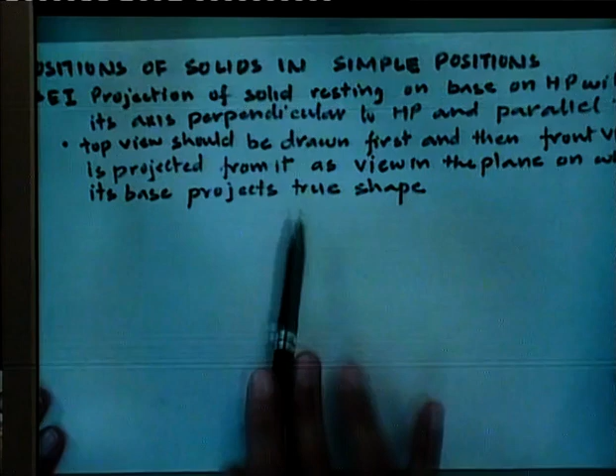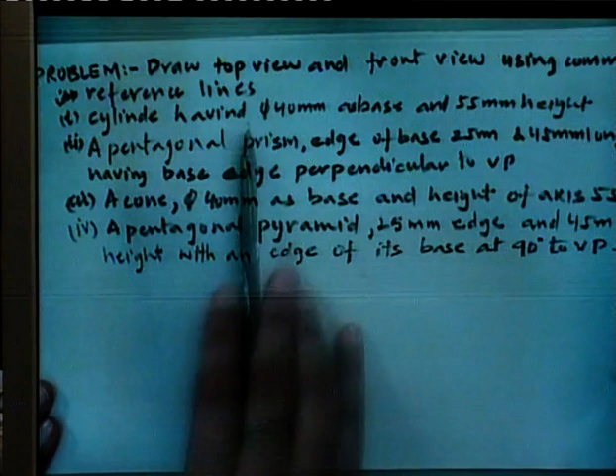Example for this case, simple case. Now the problem is draw top view and front view using common reference lines. First problem is cylinder having diameter 40 mm as base and 55 mm height.

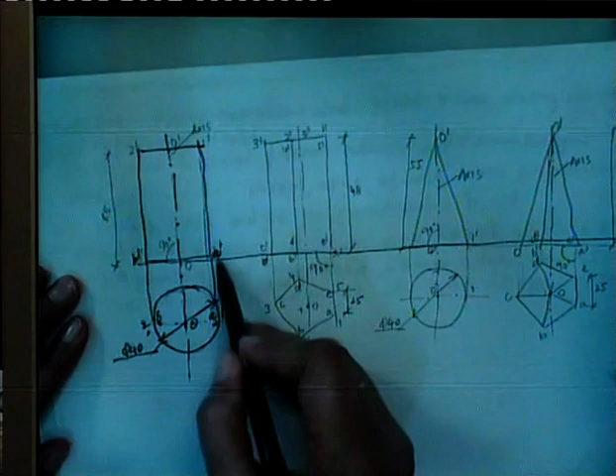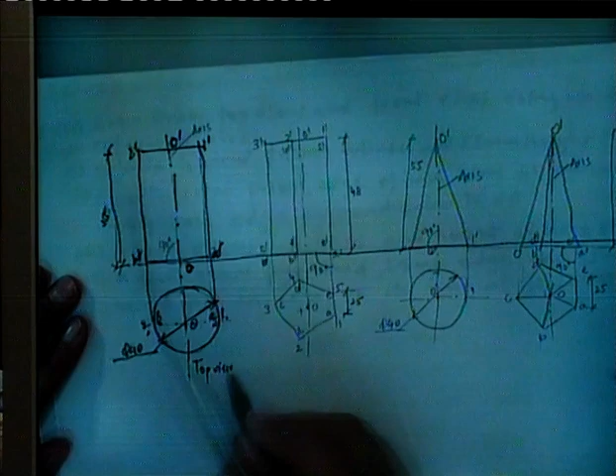Of 55 mm. So this is top view of cylinder and this is front view of cylinder. Now take second problem, that is a pentagonal prism, edge of the base 25 mm and 45 mm long, having base edge perpendicular to VP.

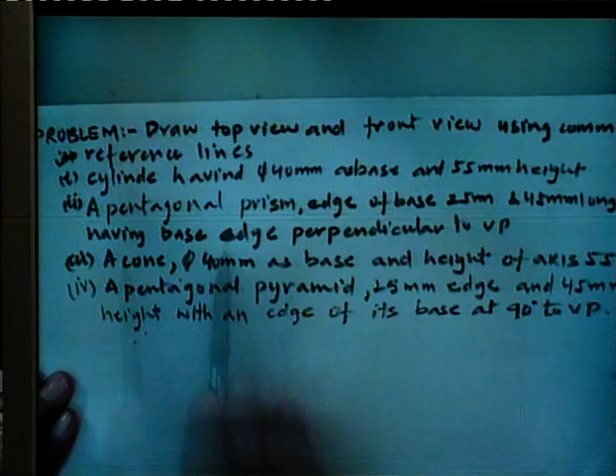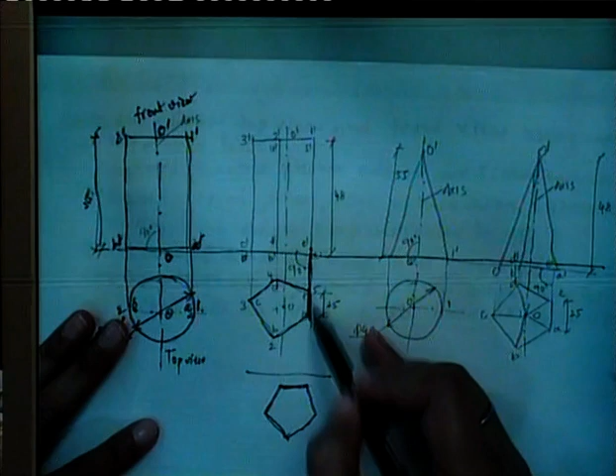First case is edge can be perpendicular to VP and second case is edge can be parallel to VP. The pentagon can be drawn in this type also. So in the problem it is specified that one edge of the pentagonal base is perpendicular to VP. So draw a pentagonal top view with one edge AE perpendicular to XY line.

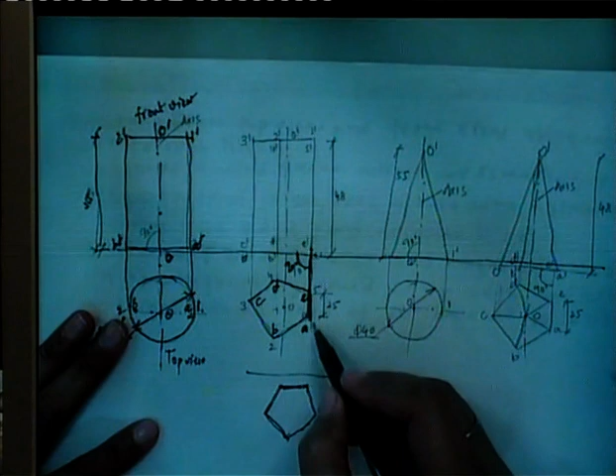So name this pentagonal prism A, B, C, D and E. Now give points for the top pentagonal base 1 2 3 4 5. Now take these projections upwards. Cut the height of 45 mm. Project this corner upwards, center line from the center. This is center O.

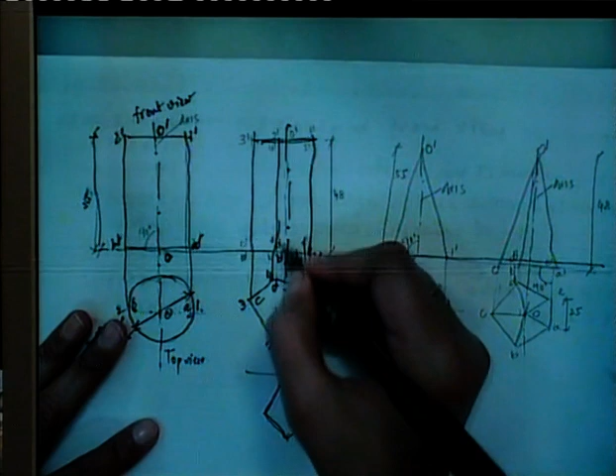Now name these points A dash, because this is front view, B dash, D dash, A dash, E dash, this is C dash. Now upper 1 dash, 5 dash, 2 dash, 4 dash and 3 dash. This center is O dash and this is O. So this becomes the front view and this is top view of pentagonal prism.

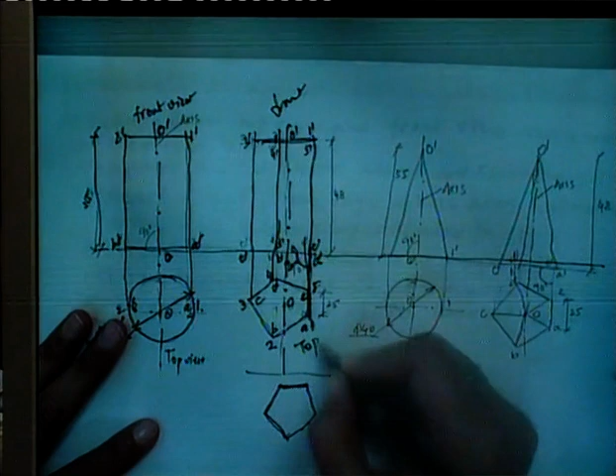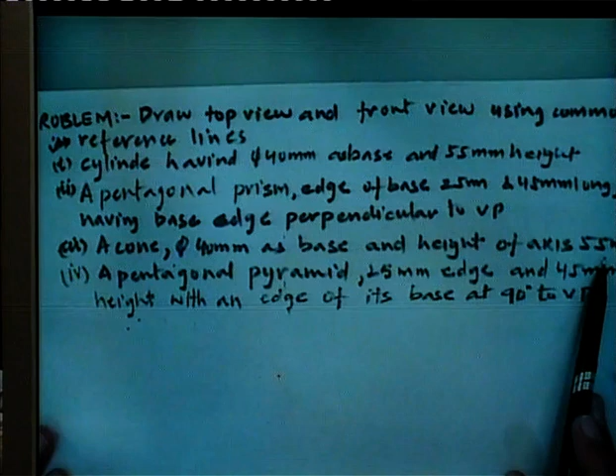So when the solid is placed in such a way that its axis is perpendicular to HP and parallel to VP, then draw the top view first and then project the elevation. Third is a cone 40 mm dia as base and height of axis is 55 mm. This can be drawn in the same way as the cylinder is drawn. First the circular base is drawn, then the projection is taken from this base.

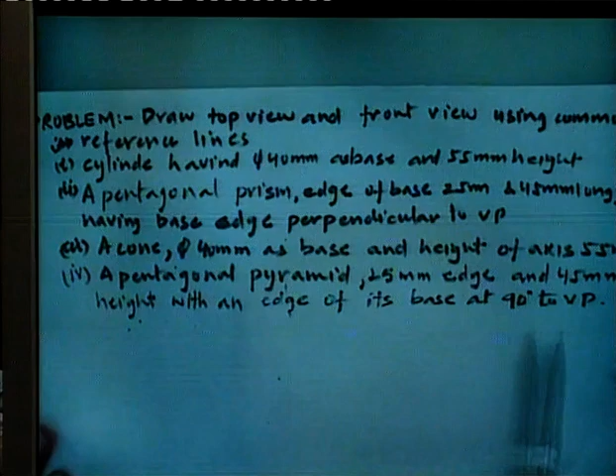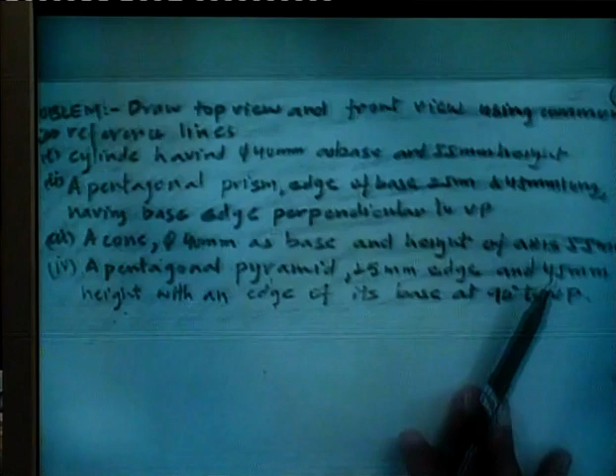Next is a pentagonal pyramid 25 mm edge and 45 mm height with an edge of its base at 90 degree to VP. Again, as in the pentagonal prism, it should be clear whether one edge of the base pentagon is at 90 degree to the VP or parallel to the VP. Now let us take the case 2.

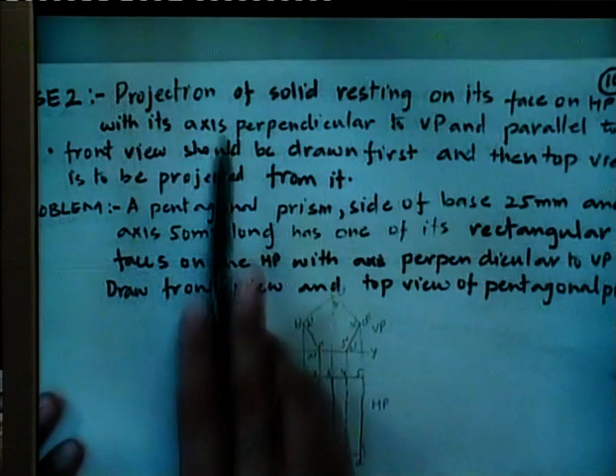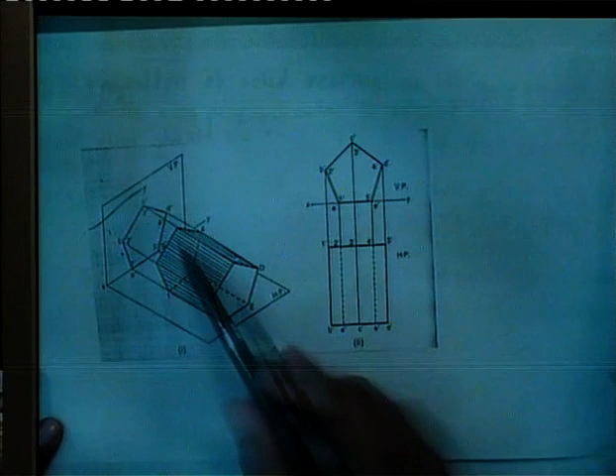In case 2, projection of solid resting on its face on HP with its axis perpendicular to VP and parallel to HP. Now take this example. In this case, the solid is placed in such a way that its face is lying on HP, so that its axis is parallel to HP and perpendicular to VP. In this case, the true shape of the base is clear from the front view. So in this case, we have to draw the front view first.

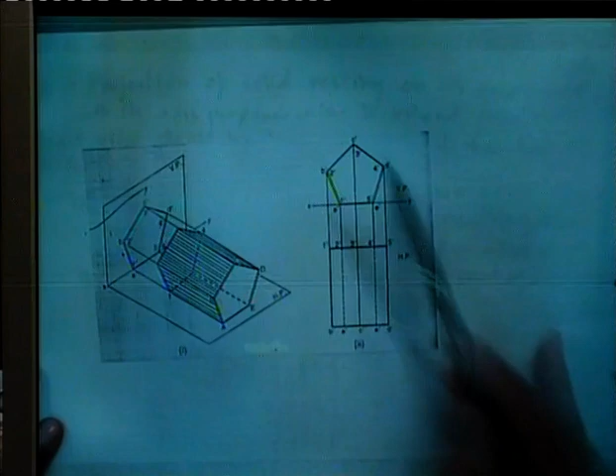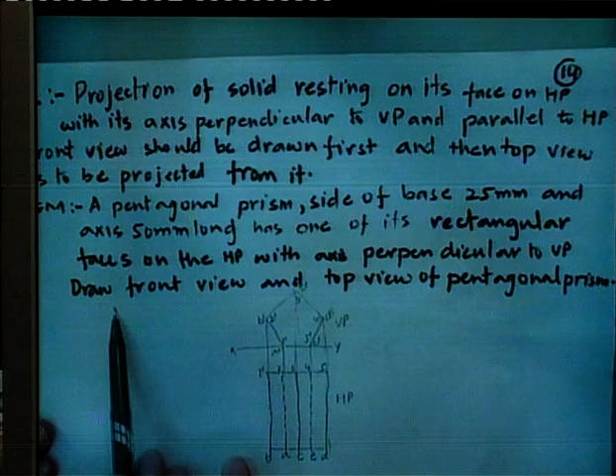Front view should be drawn first and then top view is to be projected from it. Let us take an example. A pentagonal prism, side of the base 25 mm and axis 50 mm long, has one of its rectangular faces on the HP with its axis perpendicular to VP. Draw front view and top view of the pentagonal prism.

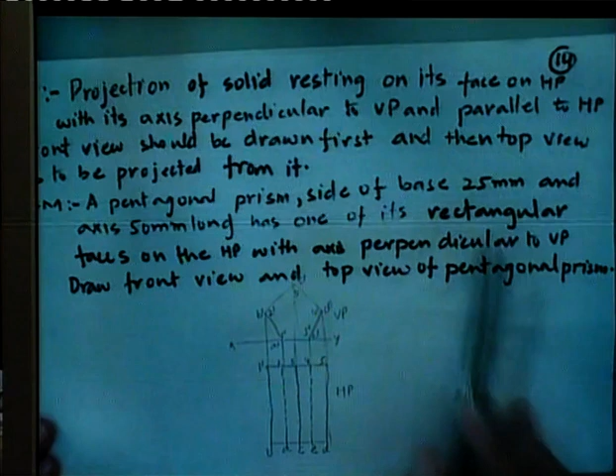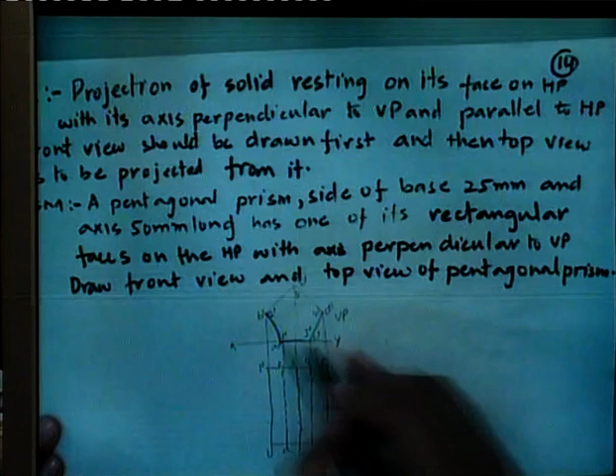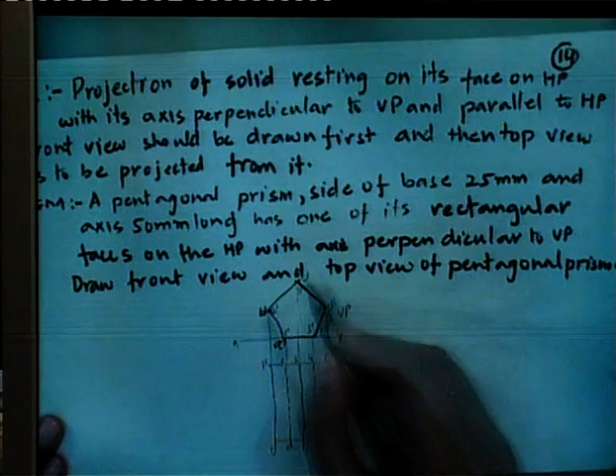In this case, side of the base 25 mm, axis... rectangular face is on the HP, so the axis is perpendicular to VP. Now first draw elevation, front view, where we see the true shape of the base. Name the points A dash, B dash, C dash, D dash and E dash. Now give the points for top base 3 dash, 4 dash, 5 dash. Now take the projections for drawing top view.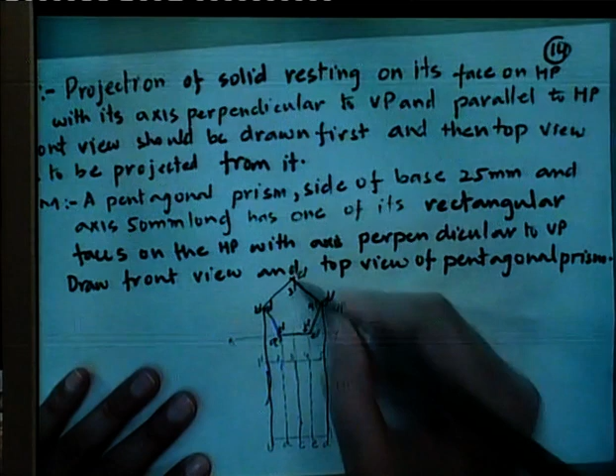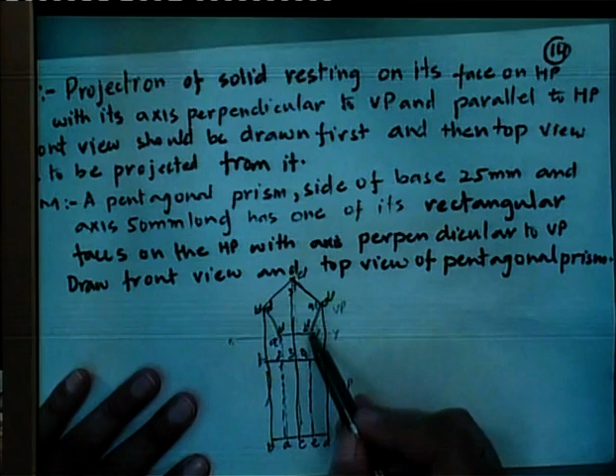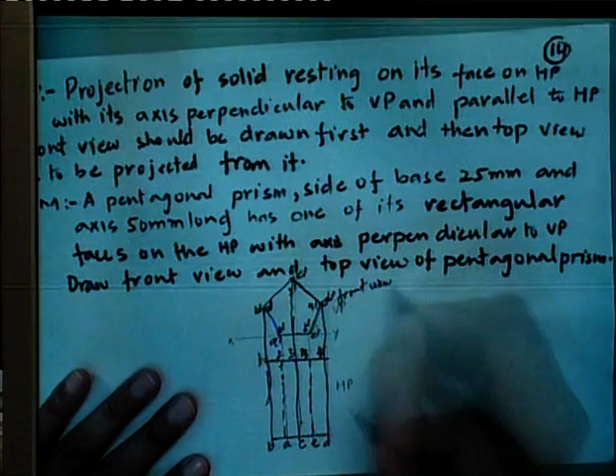This is base A, B, C, D and E. 1, 2, 3, 4 and 5. This is 1, 2, 3, this is 5 and this is 4. So this is front view. In this case, true shape of bases can be seen from front view and then top view can be projected from front view.

Now let us take the third case, projections of solid resting on face on HP with its axis parallel to both HP and VP.

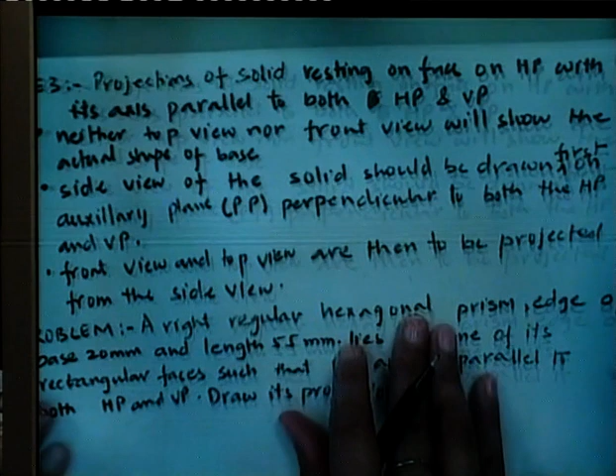This is the case. In this case, the true shape of base can be seen from side view. So in this case, side view should be drawn first. Neither top view nor front view will show the actual shape of base. So side view of the solid should be drawn first on auxiliary plane. This is known as auxiliary plane or profile plane, perpendicular to both HP and VP.

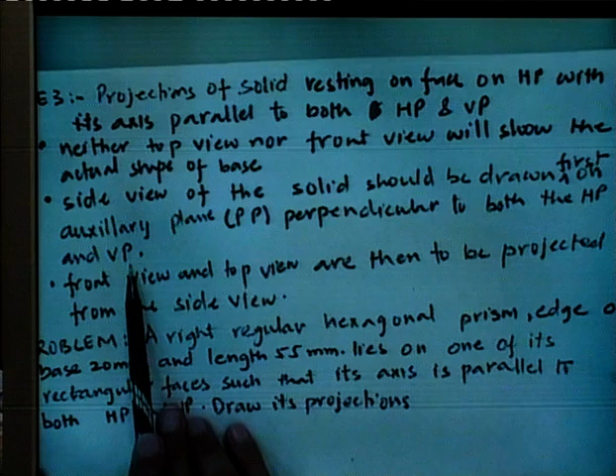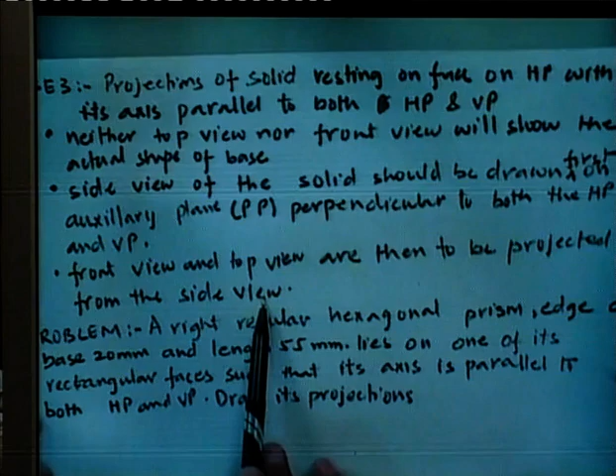A right regular hexagonal prism, edge of base 20 mm, length 55 mm, lies on one of its rectangular faces such that its axis is parallel to both HP and VP. Draw its projections.

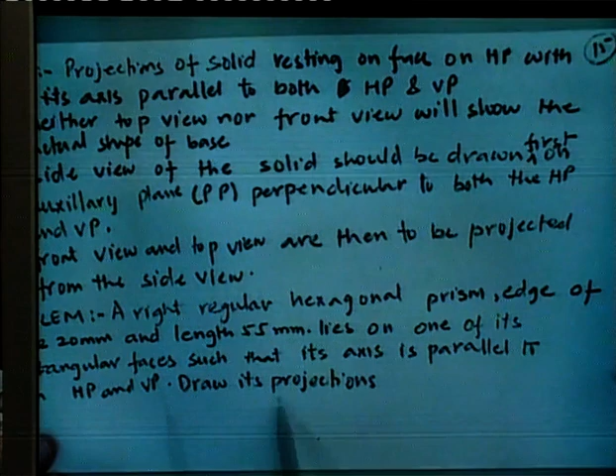This is XY, this is YZ, this is profile plane.

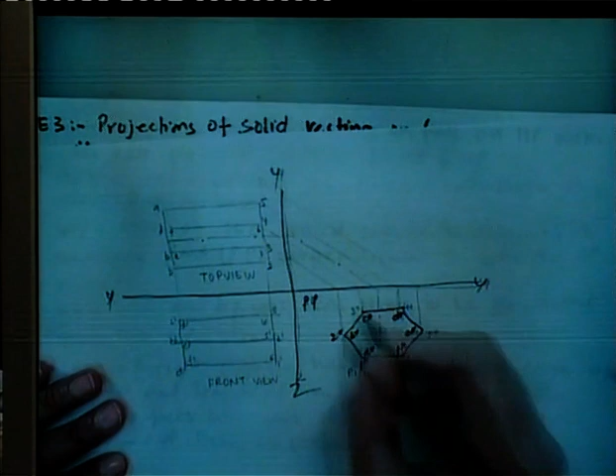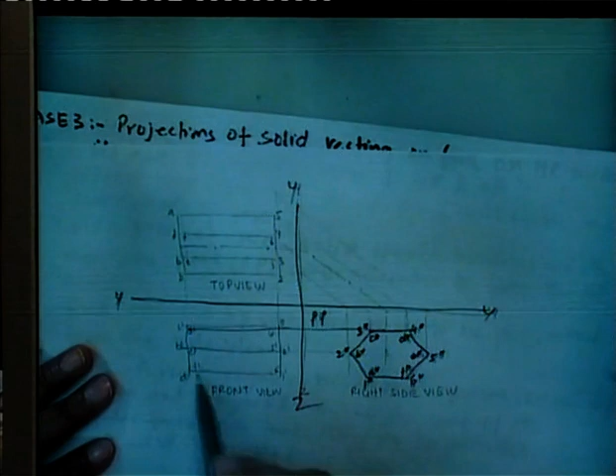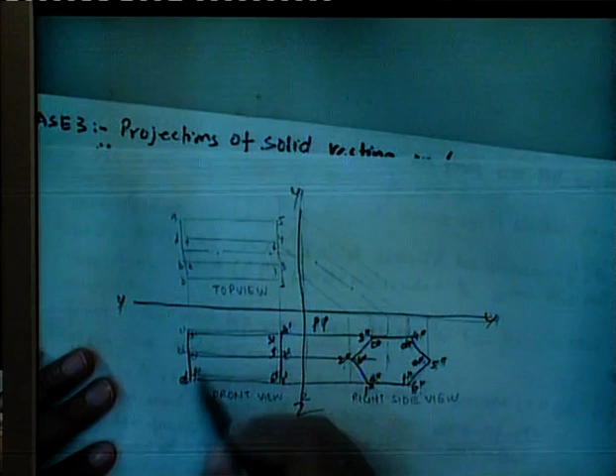This is 1 dash 6 dash, this is 2 dash 5 dash, and this is 3 dash 4 dash, and here this is A dash F dash, this is B dash E dash, this is C dash D dash.

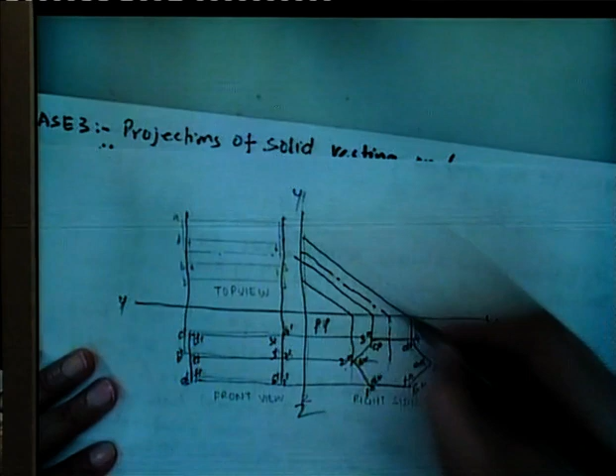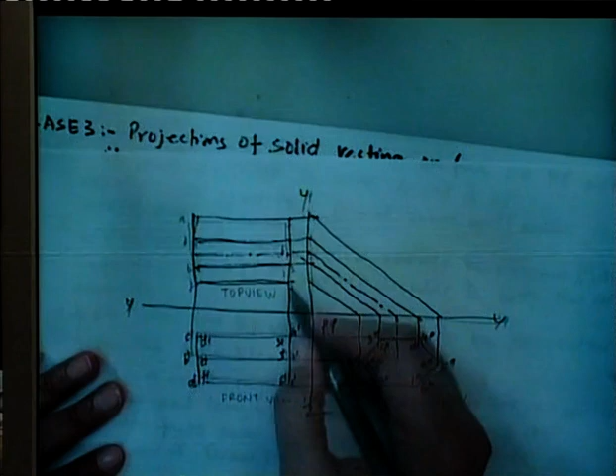Then project these lines, center line, from this reference line. So we have projected this top view. Now name these points according to these points given. This line is referred to this one. This is 2.

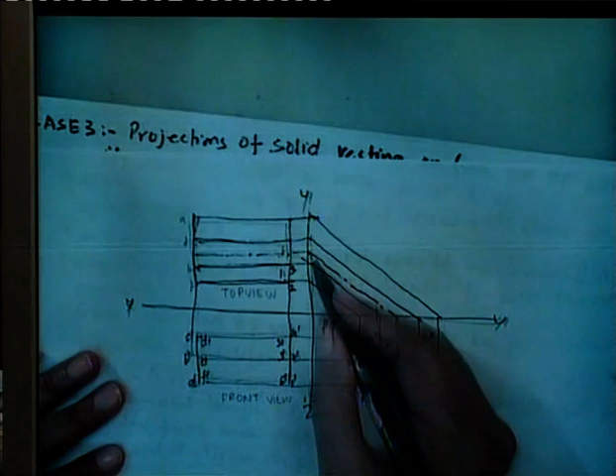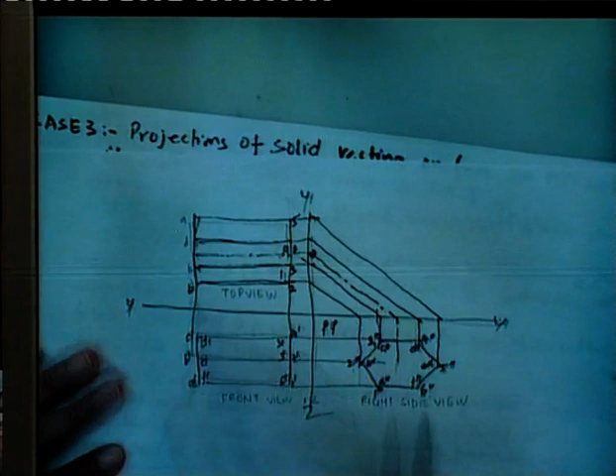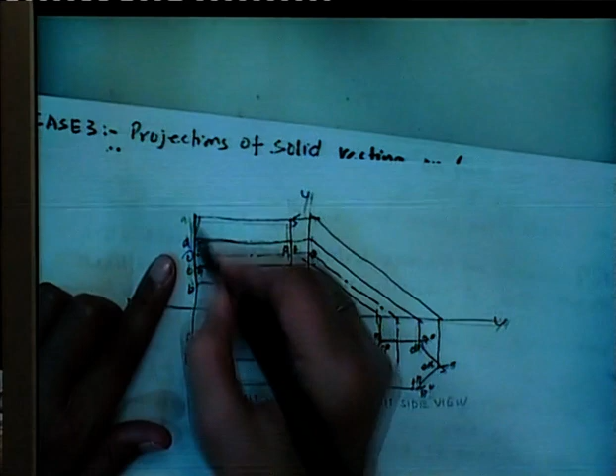Then this line is 3 and 1, and this line is O. This line is 4 and 6. This is 5. Similarly here, this line is B. This point is given name B. This is A and C. This is O. This is D and F, and this is E. So this is front view, this is top view, and this is side view.

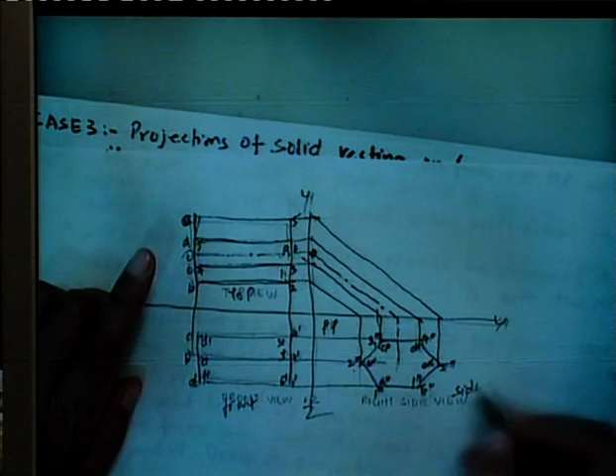So in the third case, first of all you have to draw the side view, and then through profile plane you can draw the front view and top view.